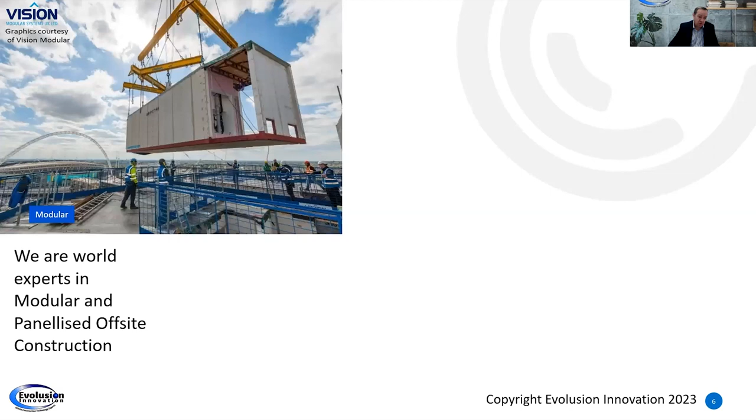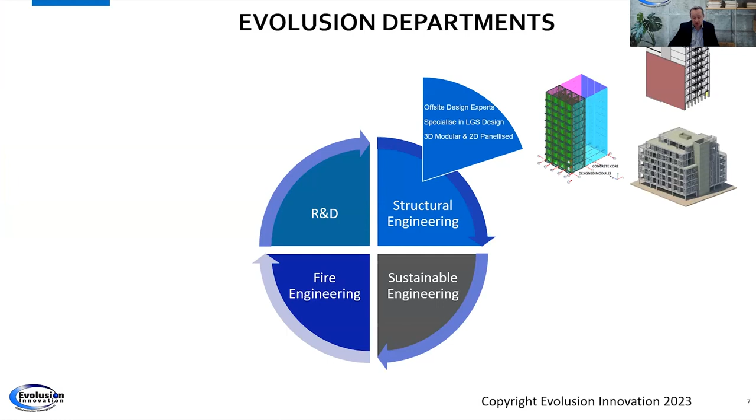So you're seeing some examples of what we do. Basically, we're comprised of 4 departments within Evolusion. Our first department is structural engineering. We specialize in light gauge steel and 3D volumetric design. The second area is really in the R&D sector, and this is where today's talk will focus. We specialize in getting third-party certifications for MMC products.

We help companies develop products, and we manage structural fire testing. We would do about 75 structural fire tests a year, varying across all sorts of tests for different manufacturers. Our new area of expertise is thermomechanical modeling for high-risk buildings.

This is particularly high buildings where we do a lot of heat transfer modeling, thermomechanical modeling. It's a new area coming from the Building Safety Bill in the UK. We also have a sustainability department, which focuses heavily on embodied carbon value engineering. So it's a big part.

Obviously, embodied carbon is huge, and we have a big department of that. So as you can see, it's all interlinked. We have structure, we have sustainability, and we have fire, basically.

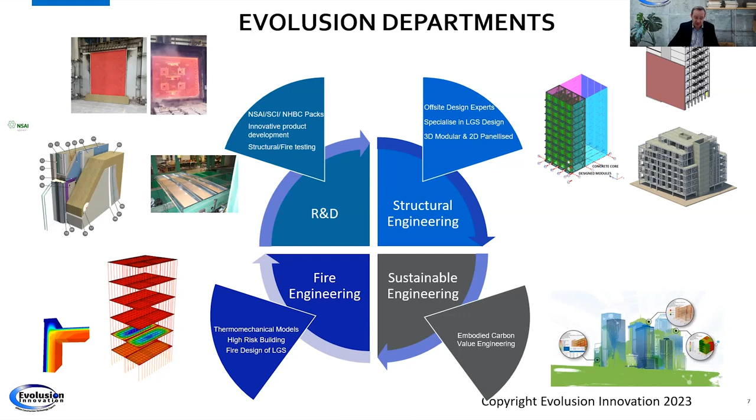So today, as mentioned, most of you are quite familiar with the categories of MMC, but in the UK and Ireland—I'm conscious we have a lot of people from the States here on the call today—we have these 7 categories. I'm not going to bore you, but today we're going to focus on category 1 and 2.

Category 1 is 3D volumetric, and category 2 is what we call a structural panelized system. We have the other 5 categories, and we do work in those other areas, but today's topic on fire is going to focus on the first 2.

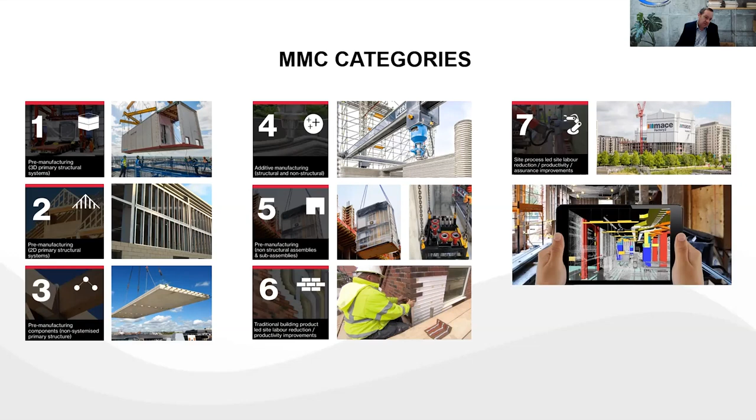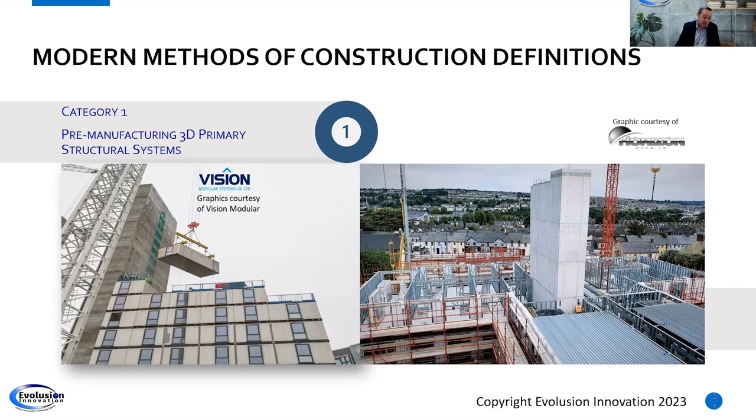So just so we're clear, on the left-hand side you see a typical category 1 system, which is a 3D volumetric system, and on the right-hand side you see a typical structural LGS system. All the systems we're talking about today are structural, so you can see the difference in the technology: one is a 3D volumetric, and the second is a 2D panel system.

So why are we doing all this, right? It's got to do with building safety and compliance, and obviously one of the other speakers mentioned the Grenfell Tower, and out of that came the Hackitt report, which identified a lot of shortcomings in construction in general.

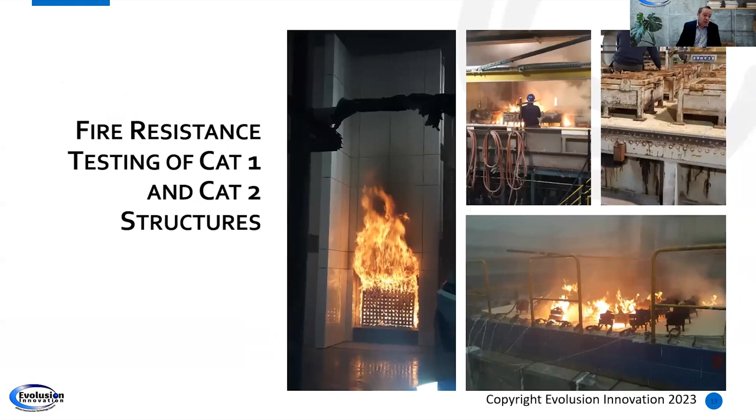So today we're going to focus, as I said, on fire resistance of category 1 and category 2 structures. But before we get into that, I'd just like to clear up something we find from a lot of people in the industry about non-combustible products.

We have a standard called EN 13501 in Europe that recognizes combustibility of products. It's very important that everyone understands that non-combustibility does not mean good fire resistance. The classification of fire spread has to do with flame spread, ignitability, smoke production, heat release, and capability producing—so it contributes to the fire.

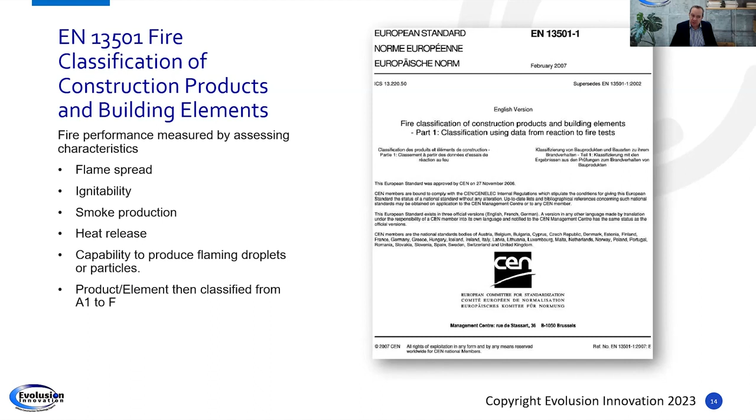What's very important, and misleading in some of these products, is that a non-combustible product doesn't necessarily mean the product is any good at fire protection—it just doesn't add to the fire. A lot of people use products and materials that may be non-combustible but have no fire resistance, and they're being used in fire resistance situations. So it's very important people understand the difference between non-combustibility and fire resistance—they're not the same at all.

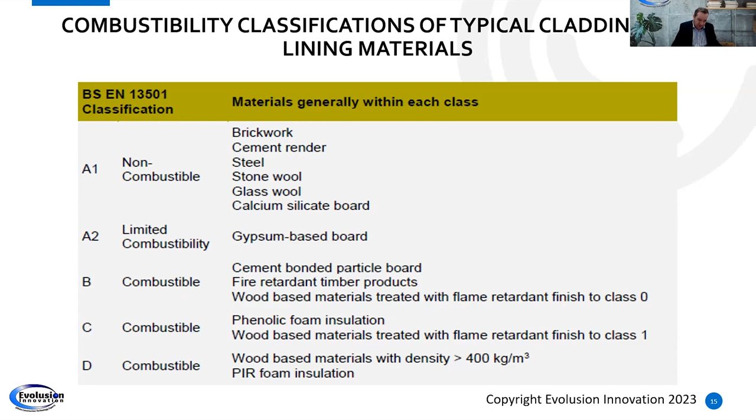Examples of products: obviously A1, A2 is ideal. Brickwork, steel, concrete are all A1; gypsum-based boards are A2; and then going down the line, wood-based products would be D—so things like OSB board, PIR insulation, different types, etc. The key thing here is it doesn't guarantee fire resistance. It is very important—if you can use an A1 or A2 product, fantastic, that's better, but it doesn't provide fire resistance.

Okay, so today we're going to talk about testing regards walls, floors, indicative testing, column testing, penetrations, and BS 8414 and full-scale testing.

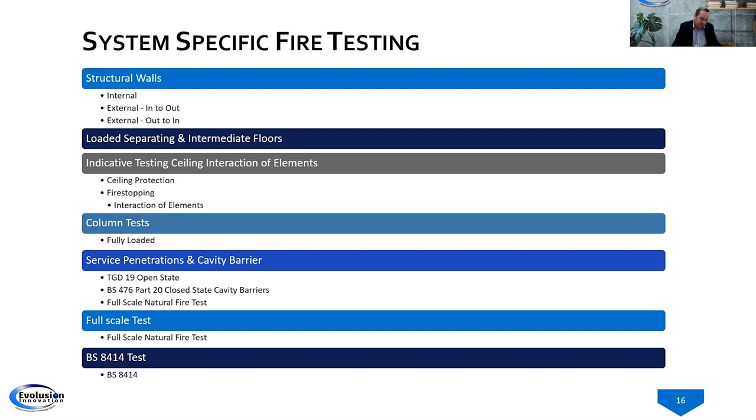Just a quick one—this is the same table, basically it's in the UK regulations, and I'm going to focus on the Irish and UK regulations in particular in this talk. The key thing we're showing on this slide is what we call REI, the REI of the walls and floors, and all I'm talking about today is structural fire testing.

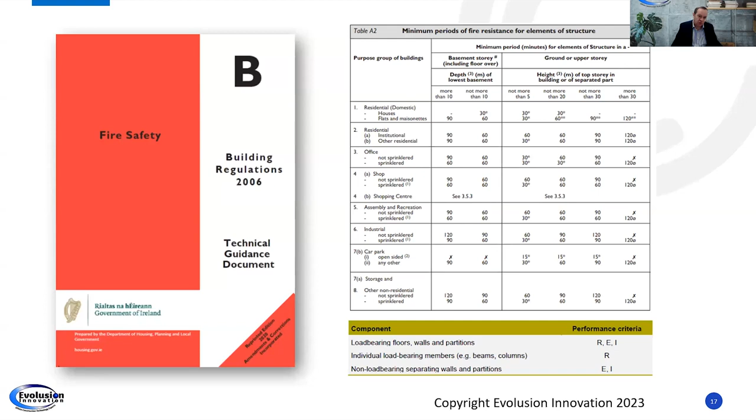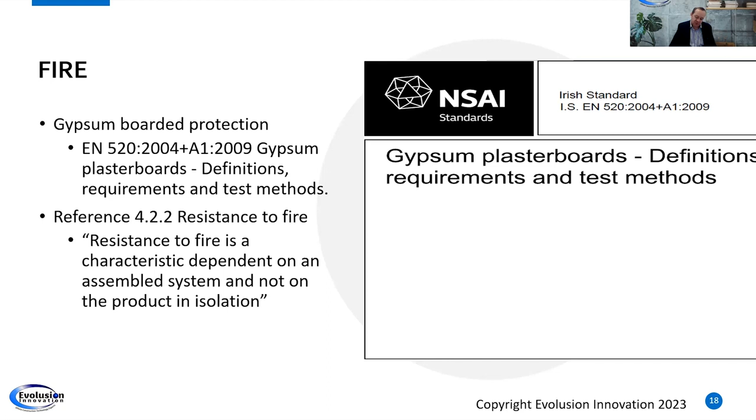We have a standard for plasterboard, and what came out of the Hackitt report is that when you look into the standards, plaster manufacturers went back to the statement: resistance to fire is a characteristic dependent on the assembled system and not the product in isolation. So just because you have a product, a board, for example, and most of these systems are protected with some sort of board, the key thing is even the standards tell you that yes, the board has a resistance, but it must be tested with the system. It's so important that you test the system.

Starting off simple, these are loaded wall tests. We typically do loaded wall tests. What's key about these is they're done to EN1365, part 1. So what's key here is adequate detailing of services, how we test the surface in the walls. The importance of load is critical, and temperature of the steel for the duration of the test. All testing is generally with type F boards, and this is very important with fire resistant boards.

So today, when we talk about modular and panelized, we're really going now - we work in timber as well, but we're really going to focus on steel today because steel tends to go a lot higher, and we go quite high with some of these buildings, as you'll see. So today we're focusing on steel primarily for the example.

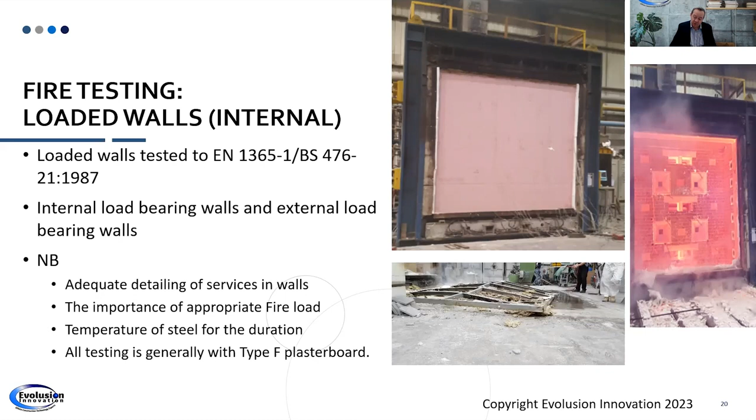I'm just showing you here visually what a test looks like. It's basically a 3 meter by 3 meter test. What you're seeing here on the outside is the back of the test rig with all these thermocouples. What you're seeing on the second picture is the exposed side - in the furnace, when it goes into the furnace, you can see we've included sockets to test them in the wall. What you're seeing on the inside is a view from inside the furnace about an hour or so through the test, so you can see the severity of the fire and how the walls were performing.

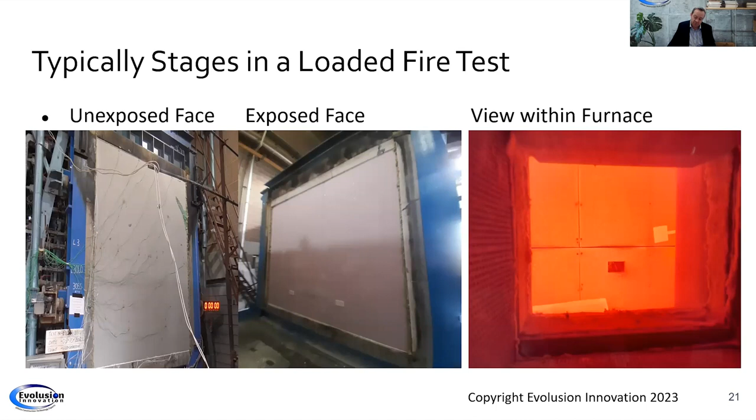Again, as the test goes on - this happens to be quite a long test, about a 2-hour test. You can see here the first board has fallen off, and the second board has kind of lasted. This is a particularly long test. This is after the test, after it's been pulled out of the furnace - that's what the inside of the panel looks like. This test would have passed, as you can see - it lasted just over 2 hours, for example. This is the unexposed side, and this was the inner side. So it's just an example of how a loaded test works visually, and they're very severe.

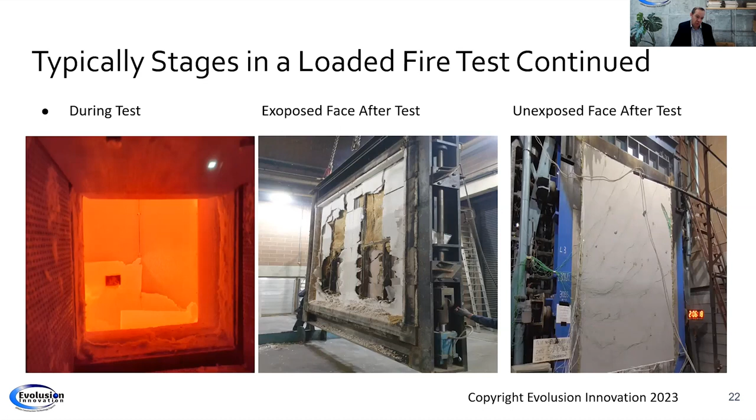Just a very quick one on testing - what's very important is you need to understand what you're doing. Where Evolusion assists is that we design these tests to comply with the test standards, but also to get additional data for future assessments. That's very important, because all the labs we use are UKAS approved, and they cannot consult or advise you. So when you go to test, they'll let you test it incorrectly because they'll just say the test is not compliant - they're not allowed to consult, there are very strict rules around their certification. So that's where we come in and advise on how you do these. What you're seeing here is we're putting thermocouples on the steel studs.

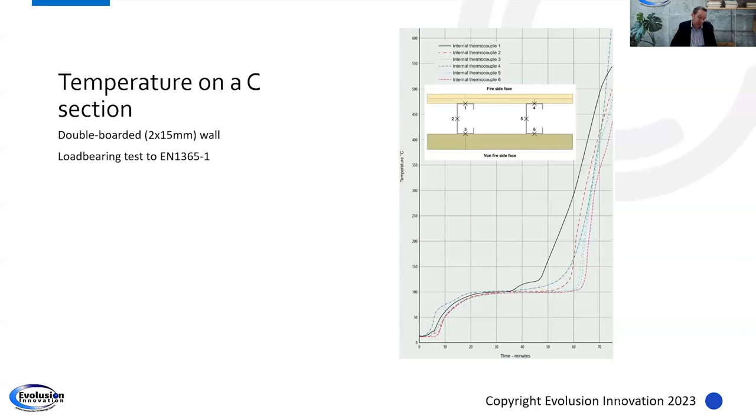Even though this is not in the test standard, this is more important than the test standard, because we need to know the temperature of the steel. It's very important. Even though that's not in the standard, you have to do this.

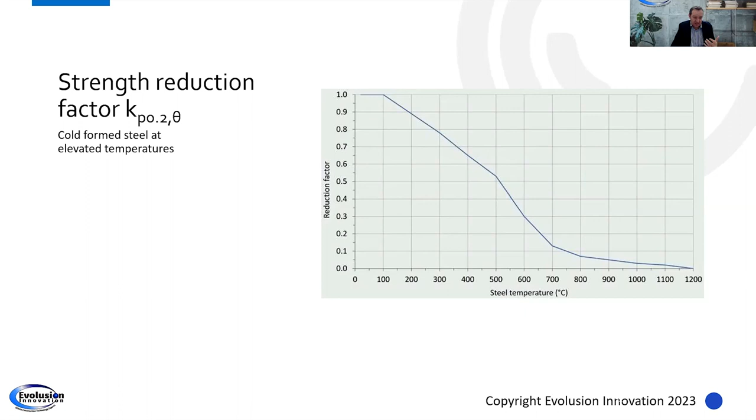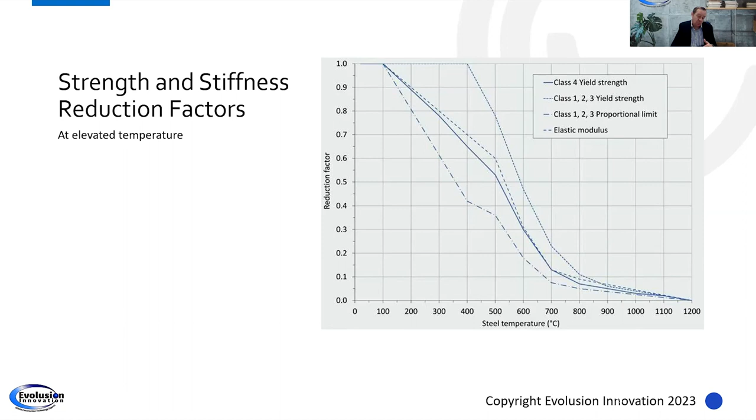Why is this? Because steel will reduce in strength as it gets hotter, so the hotter the steel gets, it has what we call a strength reduction factor. When we talk about steel sections, we have class 4 sections and class 1 sections. A class 1 section would typically be a hot rolled steel section, but in practice there are very few hot rolled steel sections used because it's quite expensive. With class 1 sections, they lose their strength at 550 degrees, but other sections lose their strength much earlier. So it's very important that we're tracking the temperature of the steel - that's more important almost than the test passing itself, getting the REI.

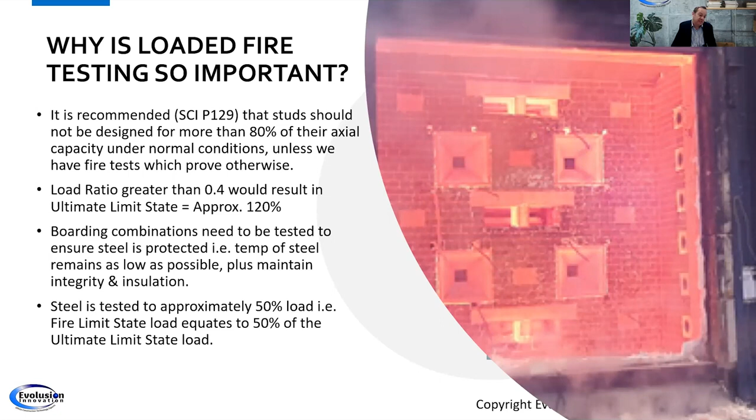So why is load so important? Because the studs shouldn't be designed to more than 80% of their axial capacity. Load's got to do with thermal bowing, and we have a load ratio. Not to bore you too much, but ultimately the steel is tested to approximately 50% of the actual load, and the fire limit state is 50%.

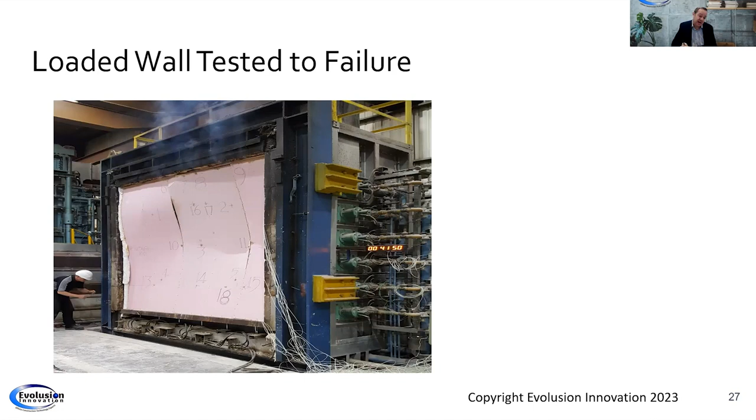What you're seeing here on the screen is an example of one that would be tested - this is a 30-minute test, and you see it got 41 minutes. We always test to this, we generally test to destruction because that's very useful. We like to get an extra 10% in our test, so this is really a 30-minute test. The longer we're getting information, the more we learn about how the steel is reacting over a period of time. This would typically be a single boarded fire test.

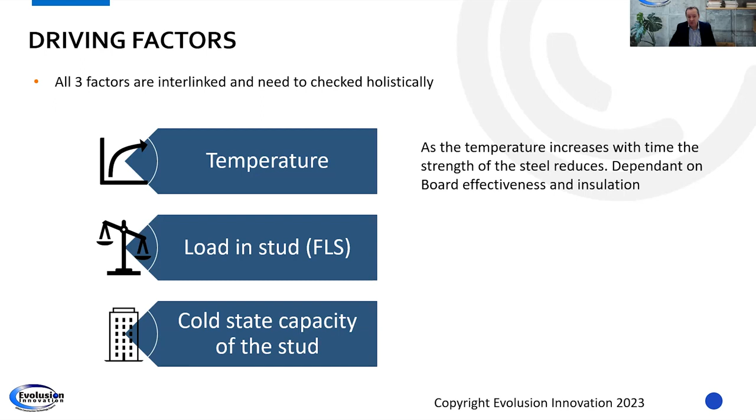So driving factors - there are 3 key driving factors when looking at one of these tests. Temperature is key: as the temperature increases with time, the strength of steel reduces, dependent on board effectiveness and insulation. So that's very important. How hard the stud is working in a fire situation is called the fire limit state, and that's very important as well. And then, of course, we have the cold capacity of the stud - what is the normal capacity of the section as it's designed?

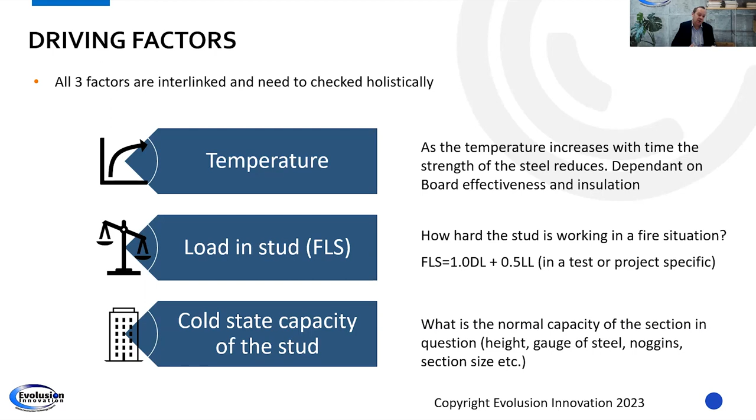Now, I don't want to confuse too much, but this is very important and it can be very complex. This is really structural fire engineering, and you need to understand this. That's why when we do these tests, we're really obsessed with the temperature data of the studs, and then we know what the studs can be designed to - that should ultimately be checked by the structural fire engineers. Hence why we have a structural fire department, and our guys would check this in their calculations, which is very important.

A very good document which we contributed to a couple of years ago, well worth being aware of, is a publication called SCI P424. Even though it applies to modules as well, it's an excellent document which provides loads of guidance on anything to do with fire, panels and modules. I couldn't but recommend that you get your hands on a copy of that if you're doing any panelized construction whatsoever.

One other key point to highlight in this document is something we get asked a lot. As I said, we're generally testing in a lot of cases class 4 sections. So when we have a test with a class 4 section, that would basically be a light gauge steel section, maybe 100 by 1.2 millimeters or something. We would have hot rolled posts in between the studs. So does that need a different test? Well, the answer is no, because it's a heavier section, and the heavier the steel is, the slower it heats up.

So if we test lighter steel and it passes at a given temperature, then we can obviously use heavier steel, which by default will heat up slower with the same protection. It's just an important note, and we get asked that quite a lot.

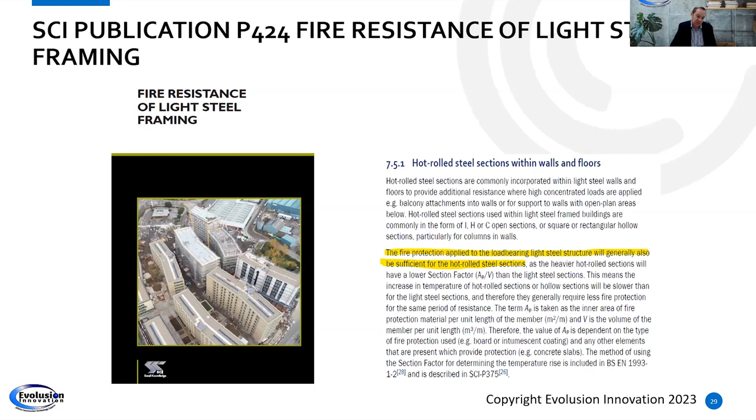Another test on the load bearing side, and a new phenomenon especially since Grenfell, is out-to-in testing. This is not to be confused with BS 8414 testing, which we'll show shortly. This has to do with protecting the wall from out to in.

This particularly applies where we have, say, a 90-minute building with structural external walls that have lightweight cladding. Generally this cladding might be terracotta, a rain screen, or an Equitone cement board product - open joint systems. We assume there's no fire resistance in the outer cladding, so the fire attacks the wall from inside the cladding, and we generally don't test these with claddings.

This is a very popular test, and we now do this with all our systems to prove performance if there was a fire outside the building. It might seem severe, but we have to look at that, especially regarding relevant boundaries and neighbouring buildings - this is very important. You could technically have a fuel load outside the building, like a bin store, and we have to manage that. So it's really for external lightweight claddings.

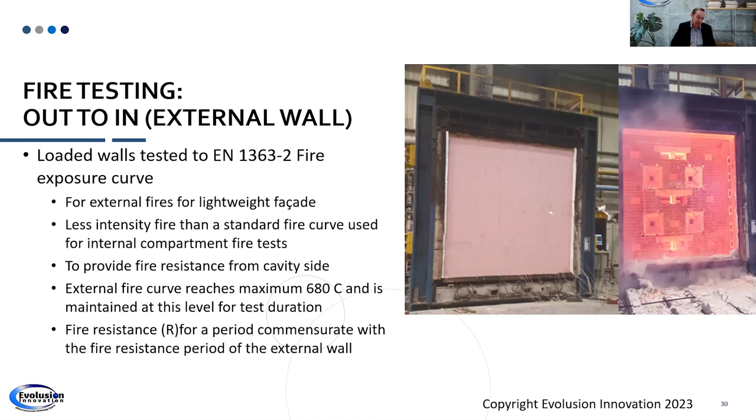You can use the 1363-2 curve, which is slightly less severe since the fire is outside and wouldn't have the same fuel capacity as a compartment fire. But we recommend where possible doing the higher curve. In this case the curve reaches 680 degrees for fire resistance. Importantly, we only require an R requirement here, not an integrity requirement, since this is protecting the structure.

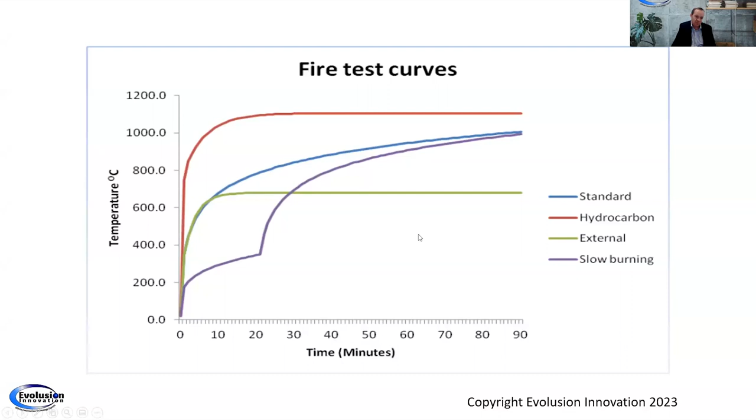Going back to the blue curve we test all our elements to - in certain situations you can use the green curve, but we'd recommend using the blue curve where possible because it's more severe and keeps everyone happy. So that's walls covered.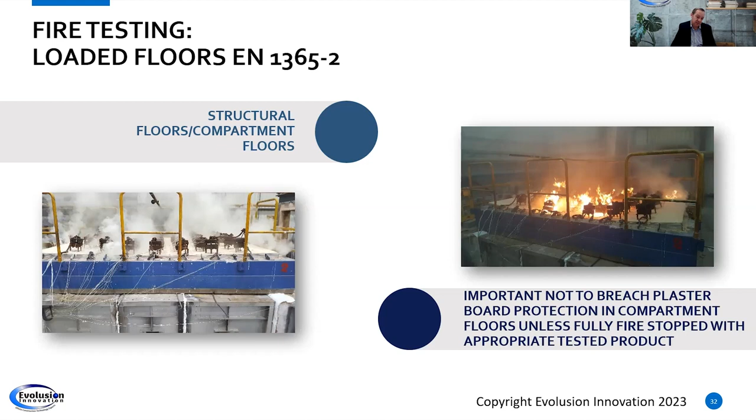Now we'll touch on floors - EN 1365 Part 2. It's a different rig, a big wide rig, and quite a different test with a different approach. The service strategy here is critical.

Keeping boarding in place is very important here because, unlike walls which are screw fixed, gravity comes into play. Often if the fixings get too hot, the boards actually fall off - the boards themselves haven't lost integrity, but the fixings overheat and gravity pulls the boards down, causing premature failure. That's why it's so important to test floor systems to ensure the boards remain in place during a fire. The strategy of keeping boarding in place is absolutely critical.

Failure is generally caused by boards falling down, resulting in deflection and then very quick integrity failure. Once the boarding fails, you'll generally get failure within a minute or two - it happens very quickly.

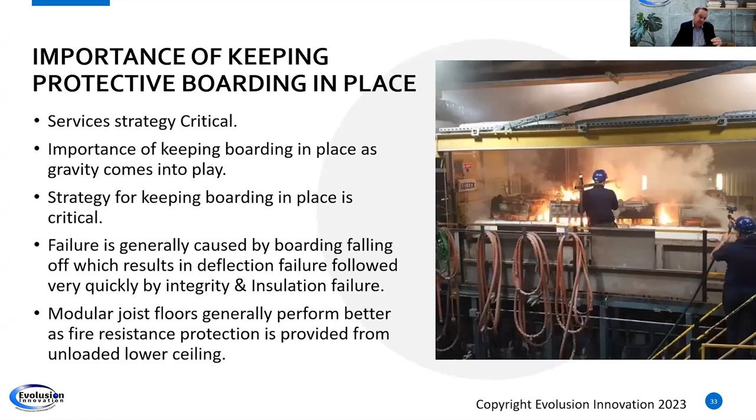An interesting note on modular construction - joisted floors in modular generally perform better than standard floors, because the ceiling is generally unloaded below and tends to last quite a long time. From our experience, depending on the system, we get better fire performance in modular floors.

We always test to destruction, and there's an example of what happens when we've tested to destruction. What we're trying to show here is the strategy for services on the floor. It's very important that we have services running in service voids here, not within the floor itself. Different codes in different countries require this.

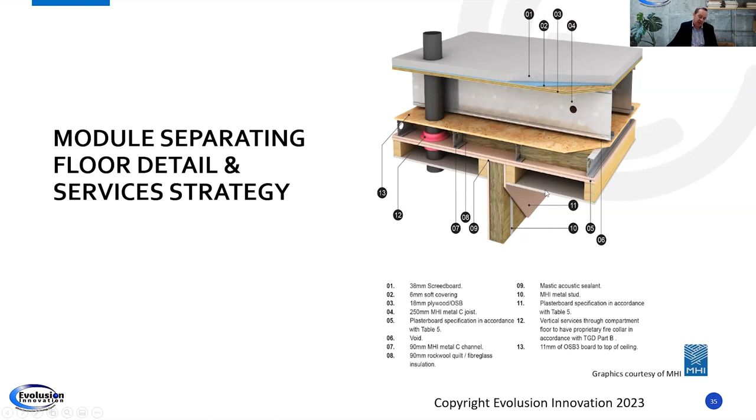In Ireland, for example, we don't run services within the floor. We're allowed to run a service vertically through a floor via a shaft system, but not run a service within the floor itself. So we generally counterbatten or use suspended ceilings underneath the two layers of fire protection lining.

Again, just showing you here, this would be a typical intermediate floor. An intermediate floor is one used in a domestic house. Something people don't realize is that this floor is a structural floor, and it has a requirement to be protected for 30 minutes. Therefore, in Ireland now, any penetration to that floor has to be fire protected.

So what you're seeing here is an example of how you would put, even if there was a vent or a range on the floor, a proper collar and the grounds you need for that collar to be fitted correctly. These must be done by licensed installers.

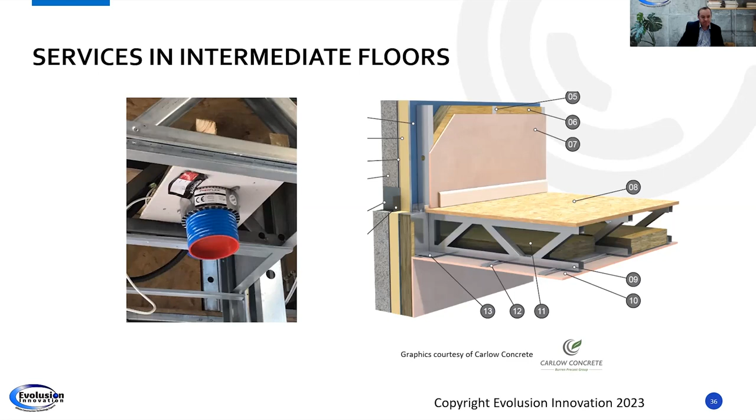Okay, so just closing out on that. There are fire tests, and what we can do after that, though we're very limited, is something called a field of direct application. So once we've done our testing, if we use two 12.5 mil boards, we can increase the boarding or decrease the height, but the field of direct application is very limited. It's important, but very conservative - it's really only stating the obvious.

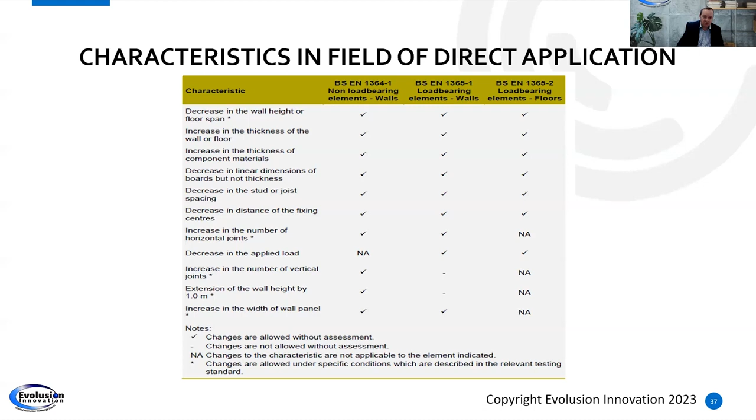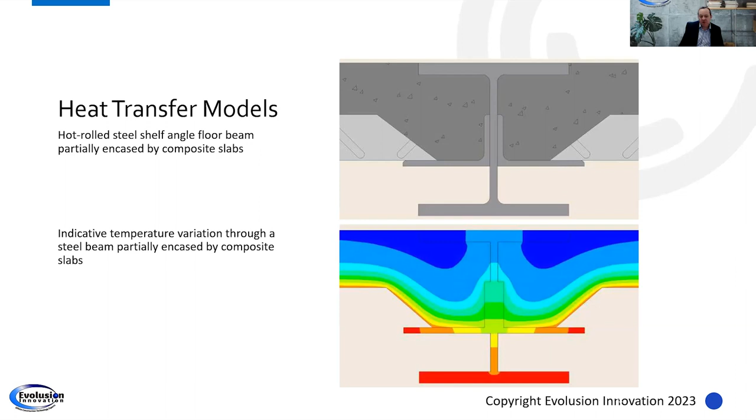A new area of work we do now is heat transfer models. These are where we take the data from fire tests and get the properties of all the materials. This is very specialist stuff - we've built up loads of data and are able to model these scenarios really accurately. That helps when planning future testing, knowing the tests will pass, and it can also help when we have a slightly different situation in a building, avoiding the need for another test when we have real data on similar materials and properties.

So what you're seeing here is a wall we're currently modelling - you're seeing the model running. This is exposing the stud from two sides, just to show you how the stud heats up, and we monitor that. It's very specialist work, and we do a lot of it.

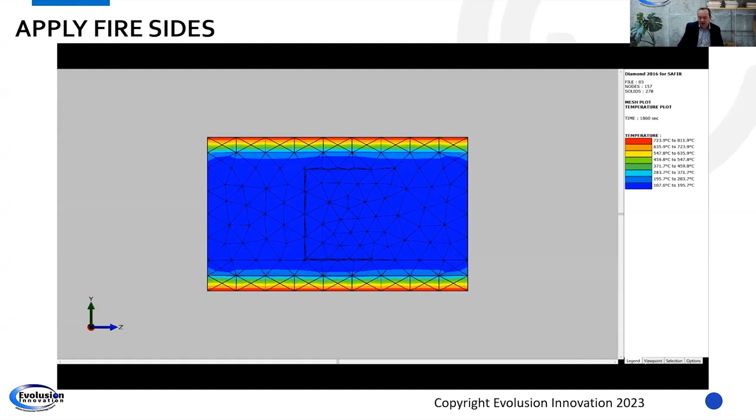Another new adaptation - as you know, fire has evolved so much in the last couple of years, it's hard to describe. So we get loads of questions now, and we do a lot of what we call interactive wall testing. Before, we had separate wall and floor tests, with simple standards to comply with. With these interactive wall and floor tests, there are no standards, so we have to modify the rigs and test project-specific scenarios.

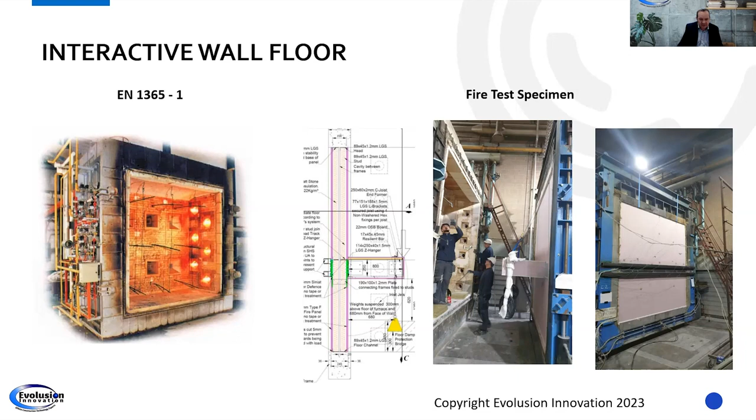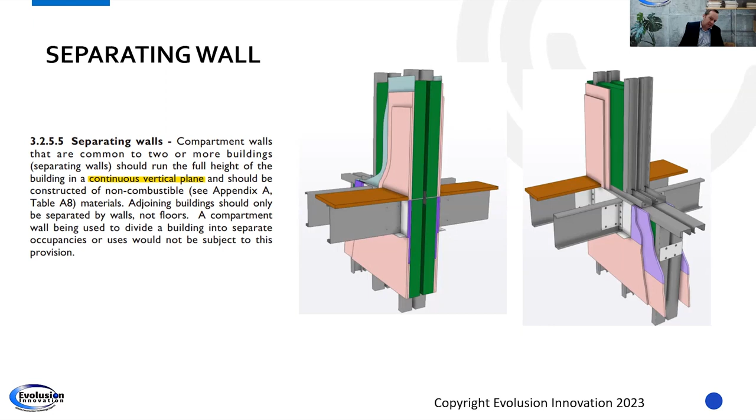In this scenario, you're seeing an example - a world's first. We do a lot of these world-first tests that have never been done before, because the rigs are designed for different tests. Here we picked a wall where questions were asked: we have a one-hour wall and a half-hour floor. What happens if the half-hour floor fails - will it breach the integrity of the wall? We had designed this in advance and knew we would pass, but for the fire consultant and fire officers, we got the test done and proved it worked. These are what we call interactive fire testing, and they're getting very popular now, where we test a floor and a wall interacting with each other.

We now move on to module testing. What's most common now in modules, or category ones, is generally two ways of loading: a uniformly loaded way, or a corner post way. What's very important is that when a column is outside the line of a wall, it's a column test; when a column is within the wall, it's a wall test - that's the rule of thumb. So when a column sticks out of the wall, it officially goes into a column test because it has 3-side or 4-side exposure, whereas wall panels have one-sided exposure. That's why this is typically a 13381 test.

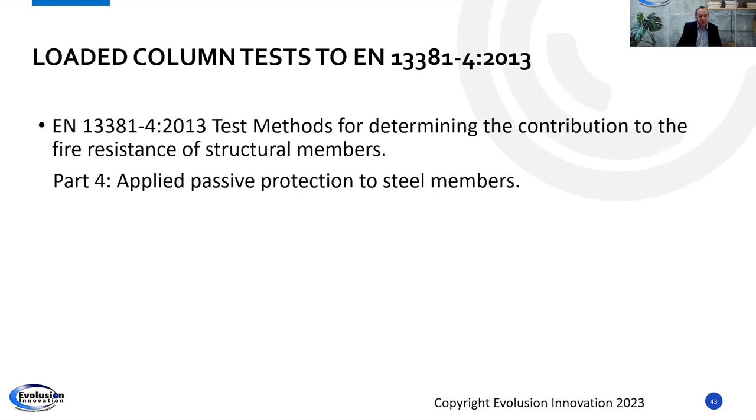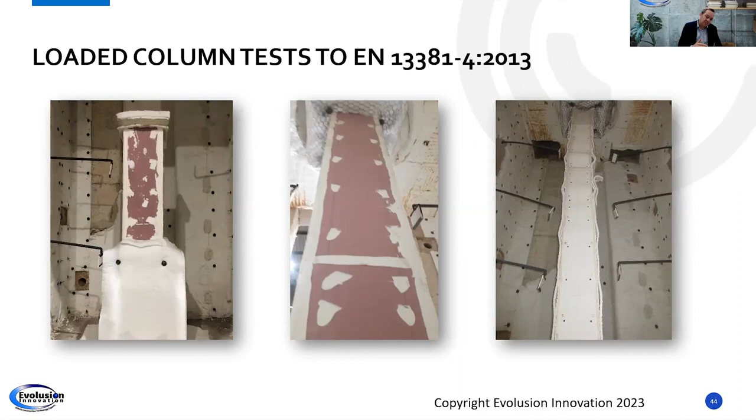What you're showing here is we would do a reference column, a small one, and then we do a full column and load the column. These columns can be loaded to absolutely massive loads. The important thing to learn is the column will always expand, and once the column expands and returns to its original length, it has failed.

That's basically it. So again, we do service penetration testing. I'm not going to worry too much with this, but all this testing is done. We test everything with the system, and it's so important that this is all done.

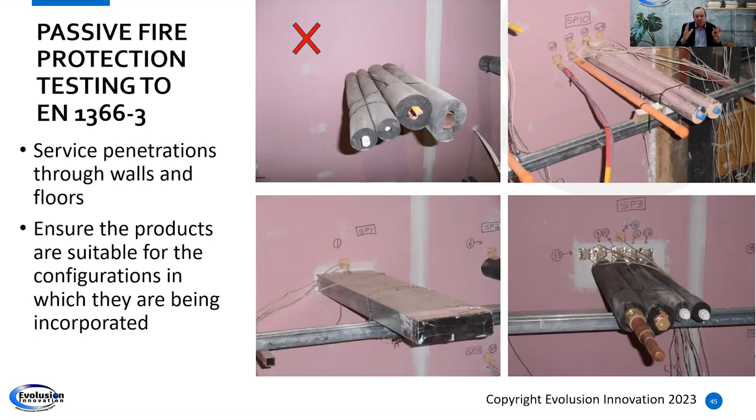Now we're going to just touch on BS 8414 testing. I think there was a lot of this before, and it was very topical around Grenfell. It's a very severe test and a very good test, but this test really was to test cavity barriers and fire spread within cladding systems. I think that's very important.

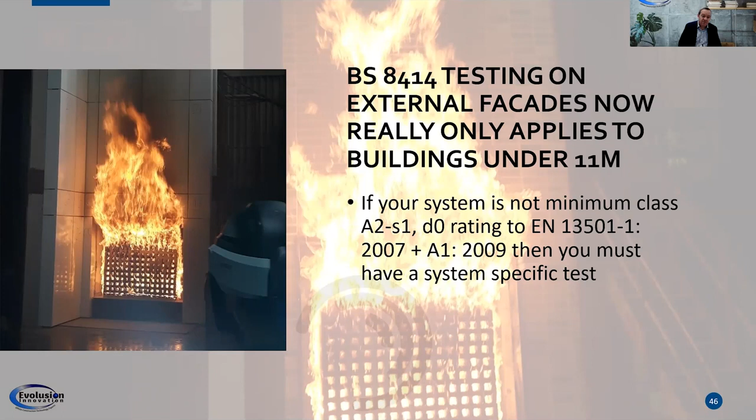There's been a lot of changes in the regulations, particularly in Ireland and the UK. This test was originally designed for over 18 meters, but it's now gone back to under 18 meters, and in the UK it looks like it's going to go back to 11 meters. So you'd use this test where you have material that's not constructed of limited combustibility, so an A2-S1-D0. If all the materials are constructed of A2-S1-D0, you do not need to do this test. If not, you should do this test as a system-specific test. But it's really now limited to 18 meters, so it's only being used for legacy issues.

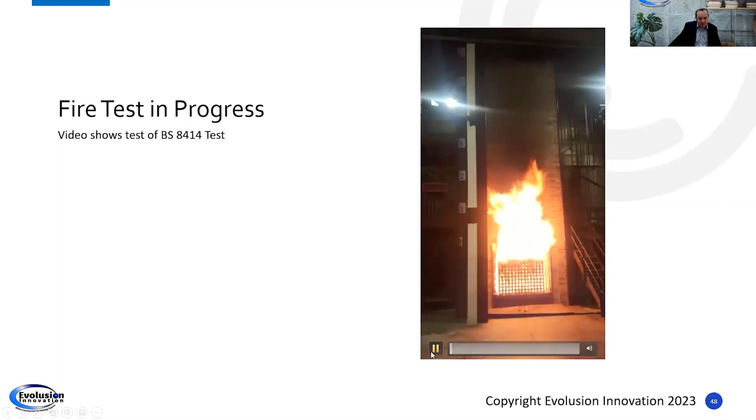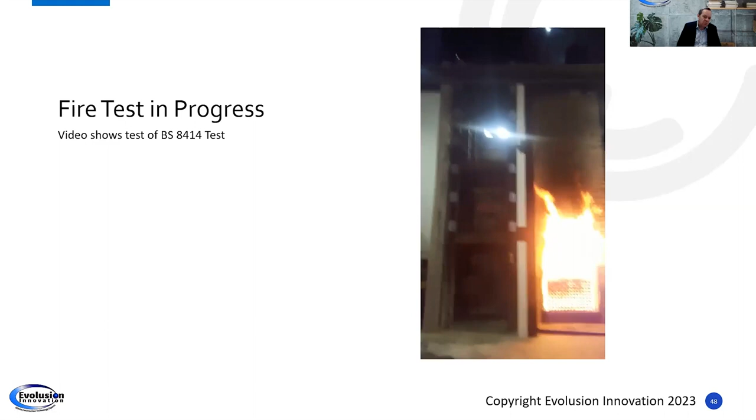There's another example there. I'll just show you a very quick snippet of one of these, in a couple of seconds, to give you an idea of the severity of these tests. They're a very severe test, and they were a good test - they have a place. So that's just that one.

Now we move to full-scale fire testing, which is the latest thing. The problem with full-scale fire testing is it's incredibly expensive and very complex, and you need to know really what you're testing. There's a previous standard called LPS 1501, which is kind of a scheme you sign up to. But now we're moving towards developing new standards for testing full-scale tests for Category 1 and Category 2 systems.

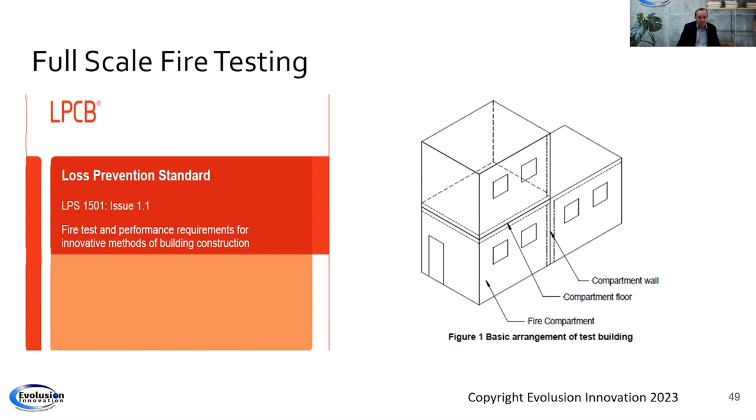The idea of the system is it's testing compartment walls, but it's also testing the compartmentation, the fire stopping, and the smoke spread between the units. So they're fantastic tests, but unfortunately very expensive. You're testing details like the fire barriers between floors and concealed spaces - you're testing all those things.

So the purpose of a full-scale fire test is to identify potential modes of failure that cannot be predicted from the results of standard elemental fire tests, to consider the response to a realistic fire scenario.

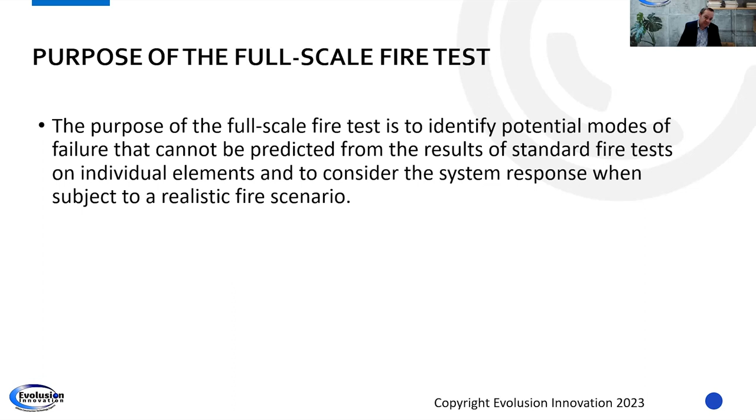As I said earlier, from our experience we've done quite a number of full-scale tests, and obviously we've done hundreds of elemental tests. From our experience, the parametric fire loads wouldn't be as severe as the elemental testing. However, the full-scale testing would identify a weakness in the system that wouldn't have been identified by elemental testing - it could be a junction between a wall and floor, for example.

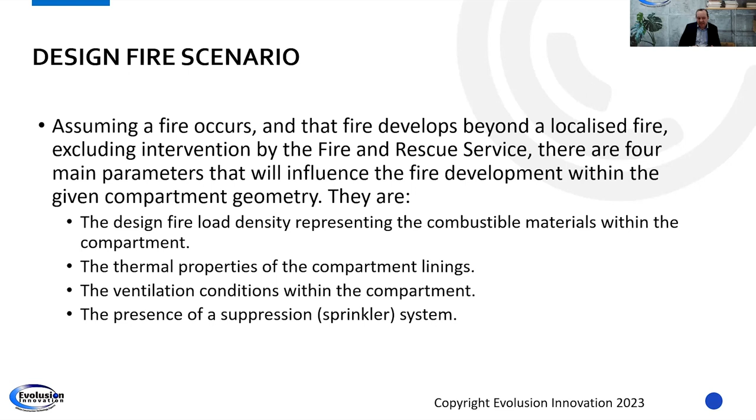So again, these are done by following assumptions. We look at the load density, and what the trend on that now is we test a full load. When they say full load, in other words, even though sprinklers are very common - in the States and here as well - we're now taking no allowance for sprinklers, putting in the worst case scenario. And then it's based on ventilation and fuel load.

So just to give an example - we're getting too technical on this call - the easier fire is a fast, quick fire. If you had a window, because you need ignition, fuel, and oxygen for a fire, so if we take a full-scale fire test, if the window blows out, we have the maximum ventilation that the fire will need.

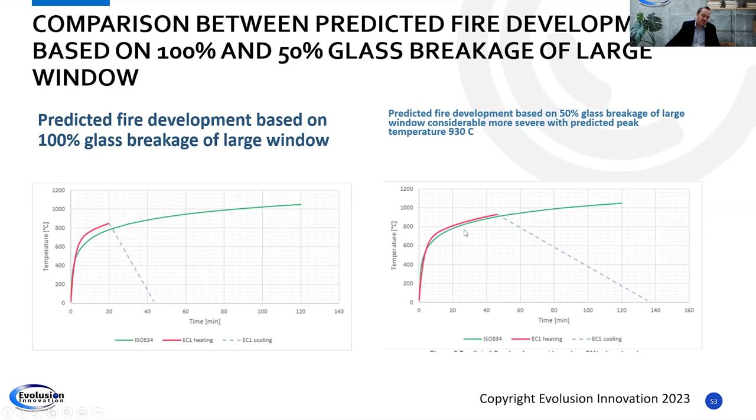Now what you're seeing here is 2-hour fire curves, typical 2-hour fire curves. A fast fire will burn out very quickly, a bit like if you have a log burner at home and let the oxygen through, it'll burn out very quickly. The worst case scenario is a slow burning fire. If you're going less than 50%, there's a good chance the fire won't ignite, so we have to have the right balance. The worst fire is a slow burning fire, as you can see, and that will last a lot longer, because that's the peak of the flashover and it falls off.

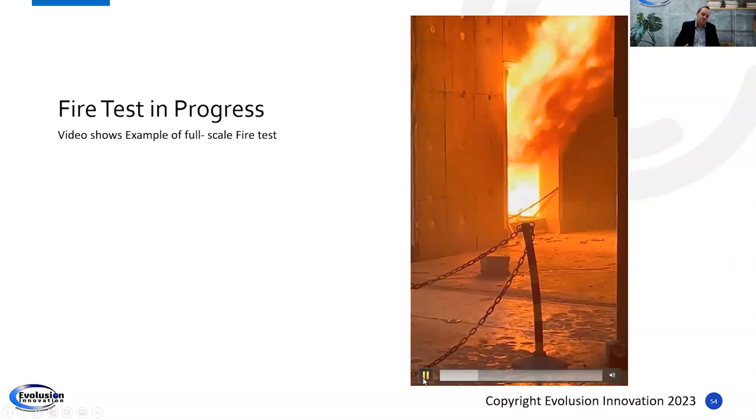So look, this is just a quick snippet of the kind of severity of one of these fires. You're seeing these are incredibly severe, same as the elemental fire test. They're very severe fires, but the issue is they will burn out, because a room can only take so much fuel, so they'll burn out.

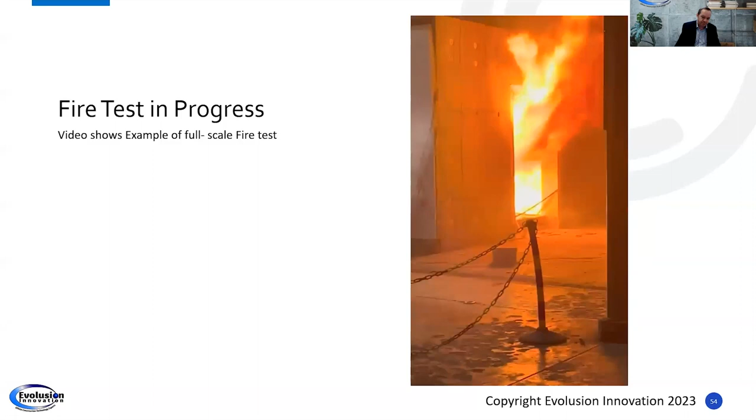So to conclude, loadbearing wall panels, service penetrations in walls are critical.

Specialist advice on structural fire testing is required before you start testing. A lot of people come to us with fire testing, and when we get it, it's no good because people haven't understood what they're trying to achieve in the fire testing. So really, before you start your test, you need to get real experts on board to guide you on what you test and what information you need to get.

Because in all our testing, we would apply probably 50% more thermocouples than the standards require, and that's because we're getting loads of very important data. It's important to us—is a product fit for purpose? So remember, with the offsite system, the purpose class of building is very important.

When you're looking at these MMC systems, by all means speak to your fire officer, your building control at the start, make them aware of the technology, and once they're aware of it, they will welcome it, and you talk them through it once you've done all the testing. Don't build it and then tell them about it afterwards.

That becomes problems. Remember, field of direct application is very limited, so don't rely on that. You can get assessments to 15725—these are special assessments which are extended application. Again, they are more and more limited now than they were. A bit more flexible than the field of direct application, but not much.

And obviously the importance of service penetration is very important with fire stopping, and it's too late at construction stage. From our experience, you need a very good quality management system on site to sign off the fire stopping, and to check what third-party certifications the system has got.

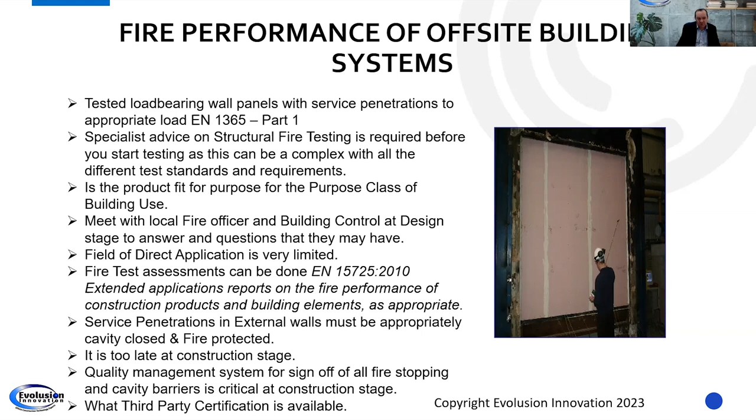So look, I'll just pick an example of Ireland. In England, we have loads. In Ireland, we have an NSAI Agrément—any MMC system in Ireland must have third-party certification from the likes of NSAI. In the UK, it could be NHBC accepts, it could be SCI, or it could be BBA for example, or BOPAS. So there's loads of them in the UK, and these are very important certifications.

Just to conclude then, this is an example of one of our clients we work with, and these are kind of world leaders in category 1 systems. We do all our R&D, and we've worked with them for a number of years. It's called Vision Modular.

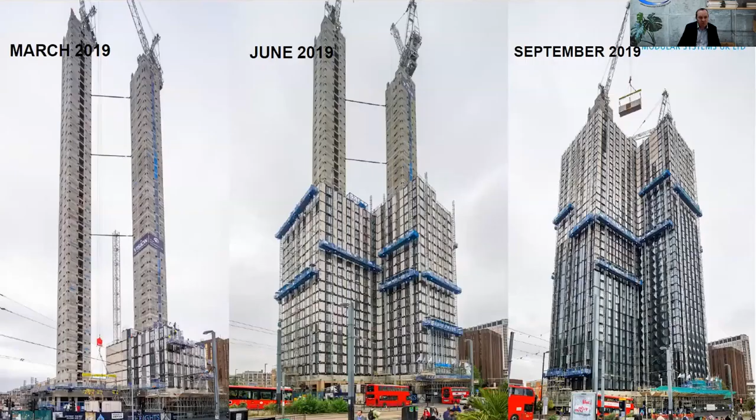You can see on the screen here, they've built all these buildings, and now they're at 44 stories, and they're actually building a 50-story building at the moment in London. Very impressive stuff—you can see the towers, you can see the speed is unbelievable. It's high rise. Look, this is best practice, how it's done, and they have a really good system.

Now obviously all the systems are lower, but this is a good example of what can be done with MMC, and it's obviously sustainable from the point of view that you can take the buildings down again if you had to afterwards. The movement off site means they're faster, and the embodied carbon is significantly less on these buildings as well, and there's a lot of research being done on that now. Our team are doing a lot of research on this system at the moment, but there are very significant savings in embodied carbon on these systems because of the fewer trades on site, and they have such control of the materials going into the system, so they can really score very well in those sectors.